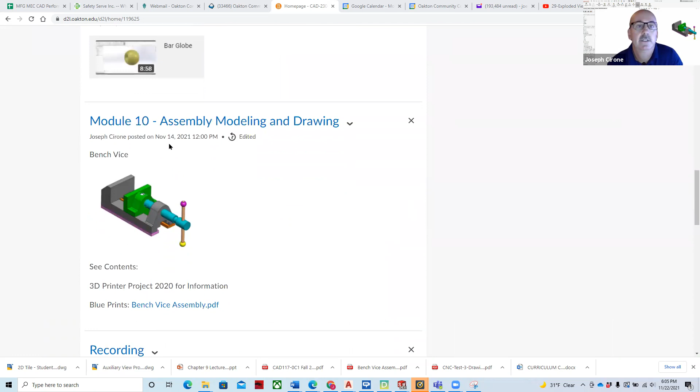We're going to continue to work on the bench vise, which is going to be due December 7th. This week is Thanksgiving week, so we're just going to continue working on our assembly drawing for module 10, and then we have module 11, our last one, and module 12.

To start this off, what I did was model the components, and I have them already set up into a folder here. Here's the folder where I created all the components. What we're going to do is a bottom-up modeling technique, which means we have the components already drawn, and then we're going to assemble them.

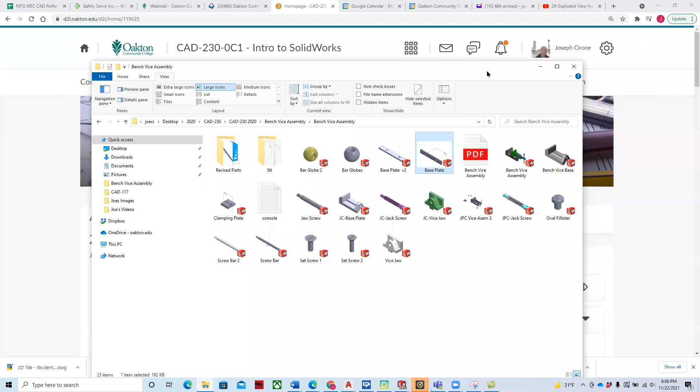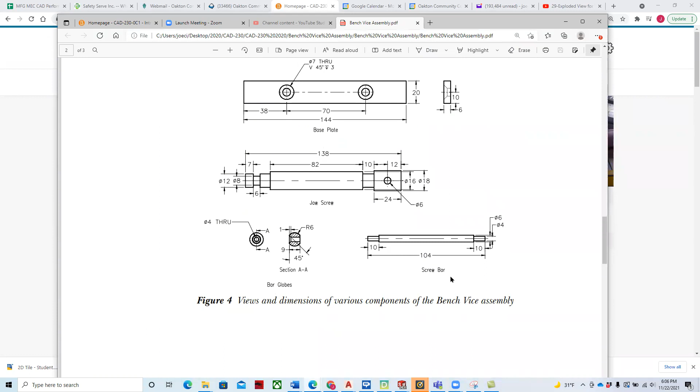If we take a look at the actual vise itself, here's what the bench vise looks like. It's composed of this base, the vise jaw, the base plate, the jaw screw, these bar globes, the screw bars, and then we have these three screws and this clamping plate.

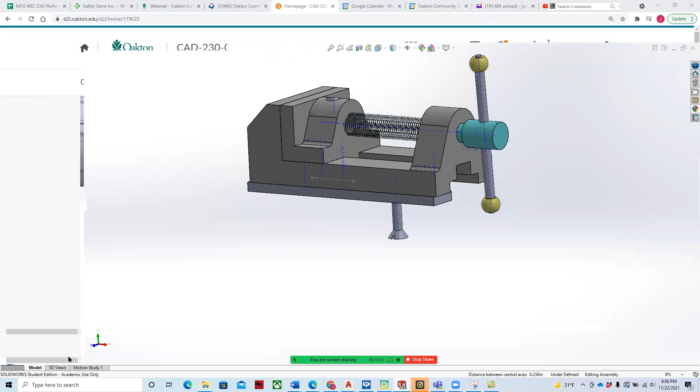It's a metric drawing, and we're going to go ahead and get that started. So we're going to start off in SolidWorks. Here's what the completed model will look like.

We're going to start off by saying File, New, and we're going to make an assembly. We'll say OK. I'm going to switch over the units for that—I guess the units don't matter. I'm going to start off by dragging and dropping in the bench vise base.

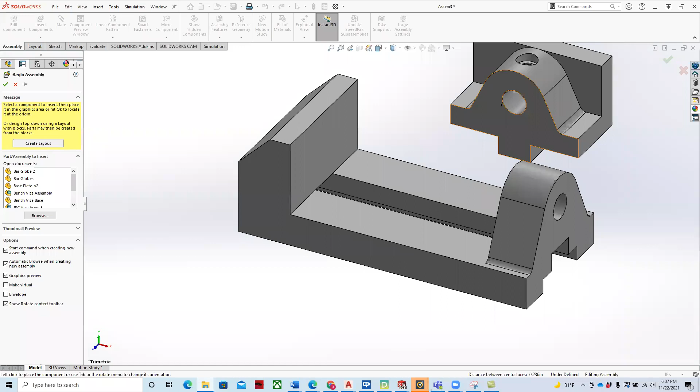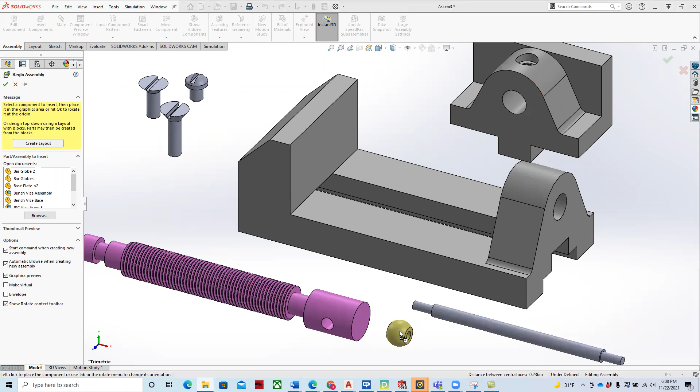Then I'm going to go through and drag in the other components: the jaw, the jack screw, the screws, the screw bar, the globe, and the base plate.

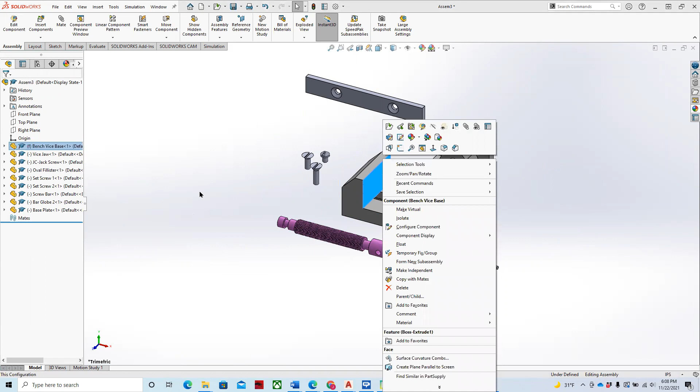Now that we have the components, what we're going to do is start to mate these different objects. You'll see that the first object I brought in has the letter F on it, which means it's fixed—it's not going to move. If we wanted to unfix it, we'd have to click on it and float it, and then we could move it and tie it back down to the origin. But for right now, it's fine the way it is.

I'm going to go up to View and go to Hide/Show, and I want to show the axes and the temporary axes of the parts. That way I can use those also to mate components too.

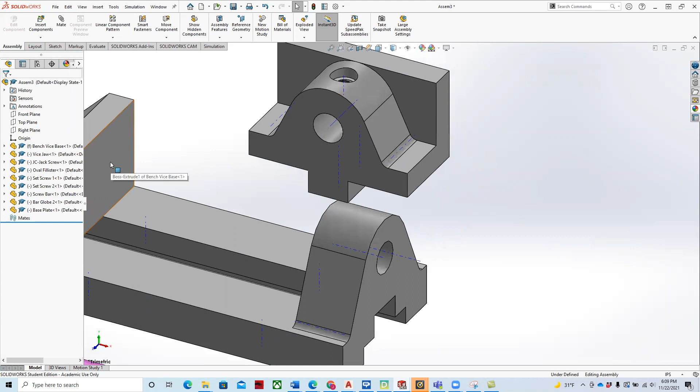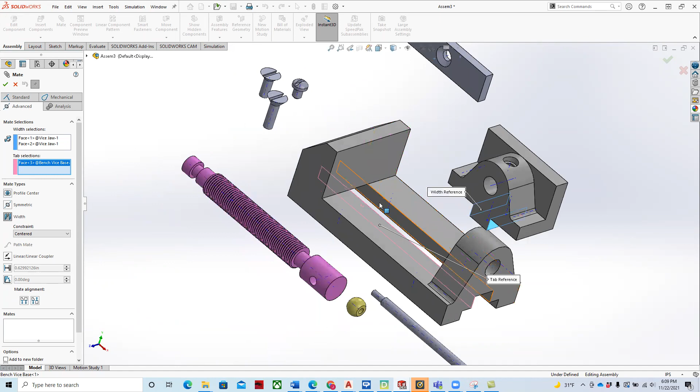We're going to start off by mating this component to this component. I'm going to start by using a width mate. So I'll go to Mates, into Advanced, and say Width, and then mate this side here and this side here to this side here and this side here. Then I'll mount those in between there with a width mate.

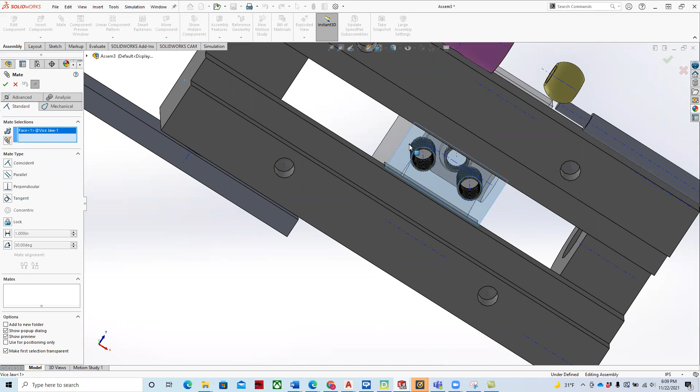Then what I'll do is move this component in here in between it, and I'm going to see if I can mount this one to this one. No—let's try that again. There we go.

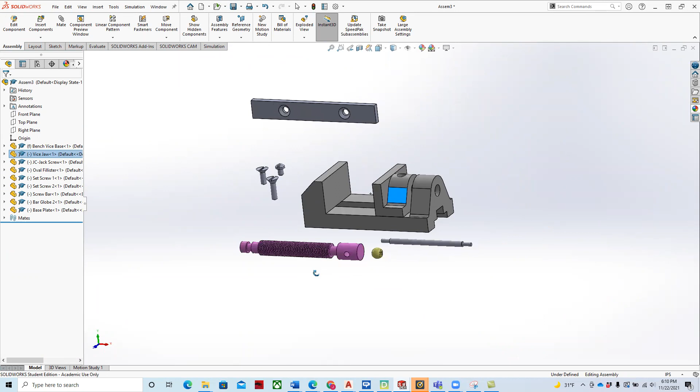So we have a coincident mate and a width mate. If we green check mark this, we should be able to move this all the way through it. Now that we've been able to put that into the proper location, what we're doing is removing certain degrees of freedom from the part.

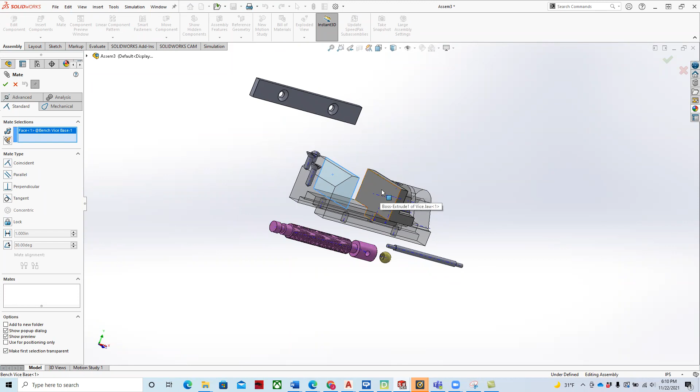What we're going to do now is mate with a distance mate this jaw to the front. So we'll go to Mate, select this face and this face, then go to Advanced, go to Distance, and set up a distance of 2.5 as our maximum, and our minimum will be 0. Green check mark. That will then mate only in between those two components.

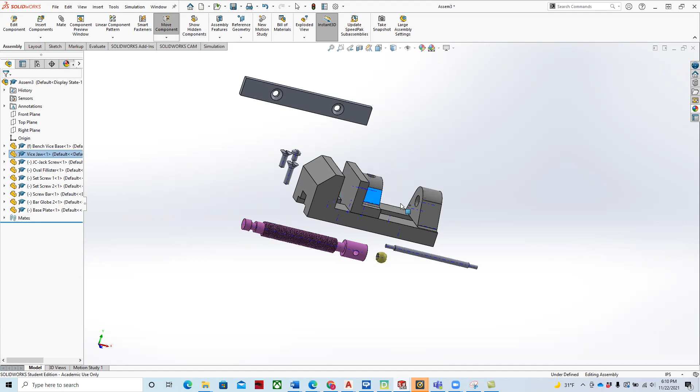All right, so far so good. Let's go ahead and put on our jack screw. We'll go to the Mate command, and we will mate this cylindrical feature to this cylindrical feature, and green check mark that. Then I'm going to pull this back.

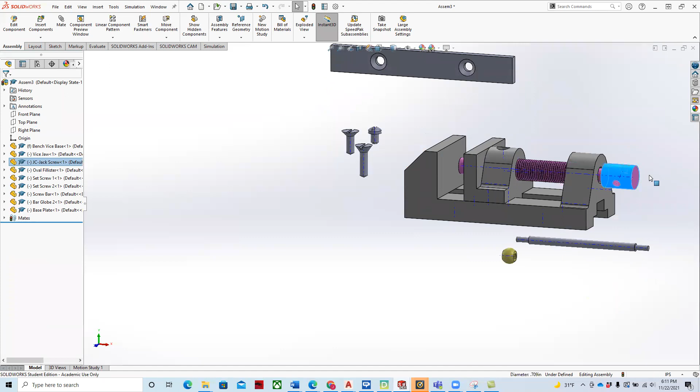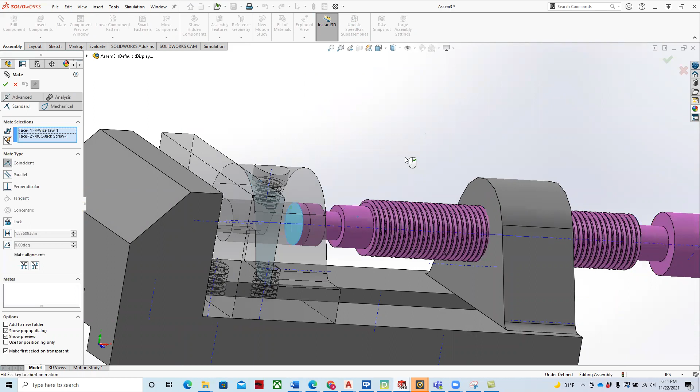Well, that didn't work exactly the way I thought it would. Let's see what's going on here. There we go. All right, and then we're going to mate this end to... oops, let's clear that out.

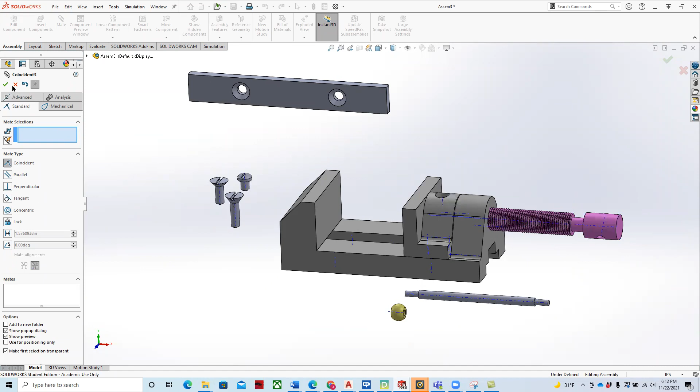Did it again. Must have took that last mate. Yeah, it did. So let's go and expand our mates, and let's just go. Well, that one's still okay because it's still concentric. It's just getting glitchy on me, that's all.

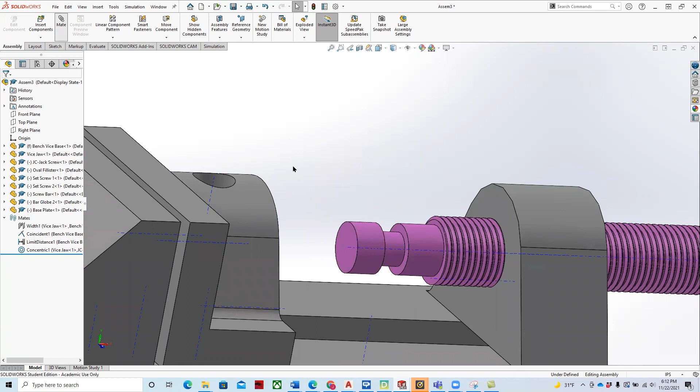All right, let's click off the part. Try this one more time. Mate this surface. Yes. And this one.

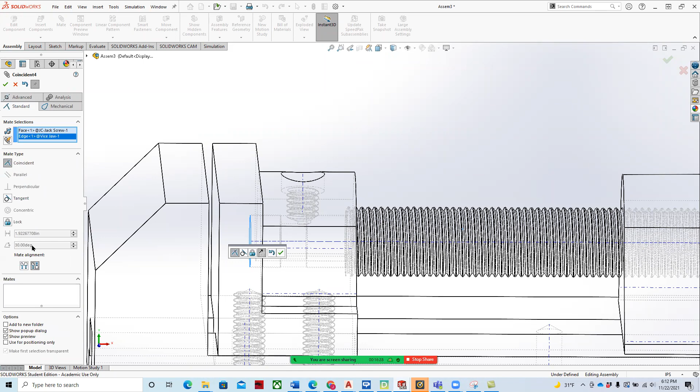Great, and then what we're going to do with this is change the visibility so that we can see it. And then what we're going to do is go into our advanced mate. And we should be able to move that.

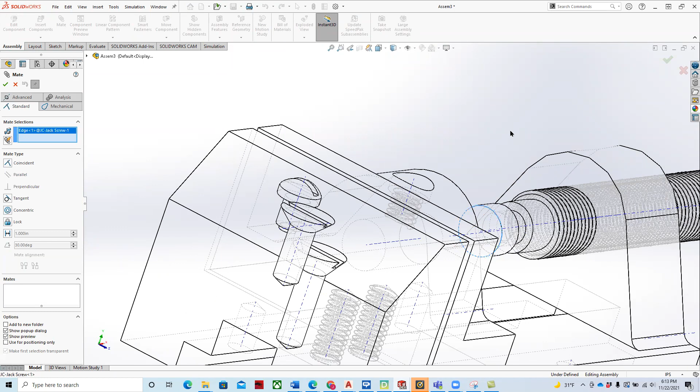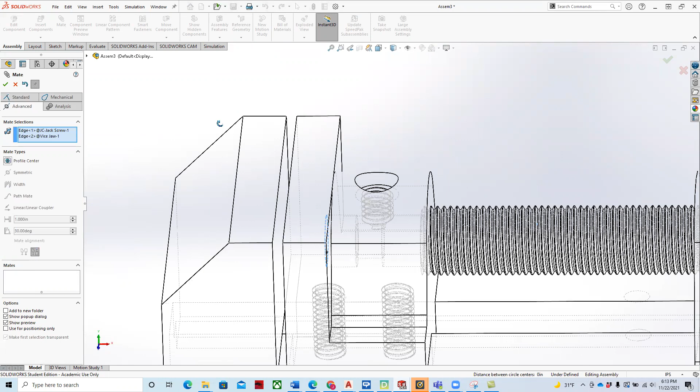Well, that's one of those days. It's good enough, it does mate to the bottom of it. I was going to try to adjust it a little bit to get it within there, but it's taking too much time, so I'm going to just leave it.

All right, so that component is now modeled. And now when we go through and we move the vise, we can see that those components work together.

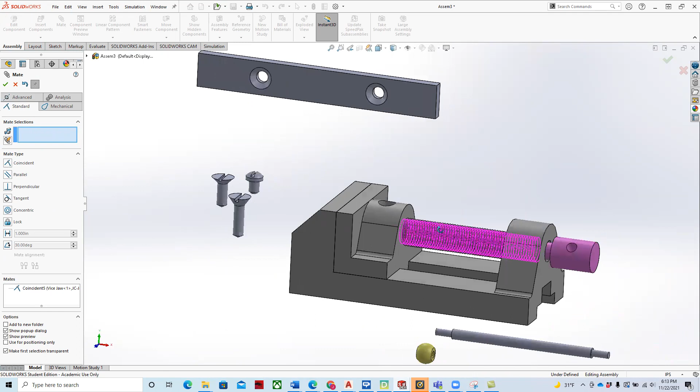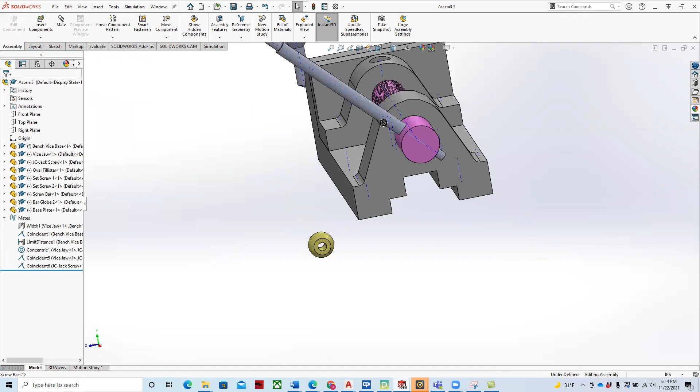We're going to go ahead and mate the axis for this to the axis for that. Green check mark it. And then we're going to move this down. And then we're going to mate.

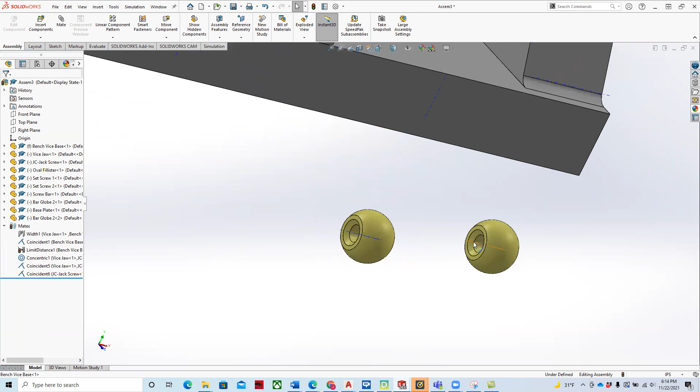Let's make a second bar globe, hold control and drag a copy off. And then what we'll do is we'll mate this to this. There we go.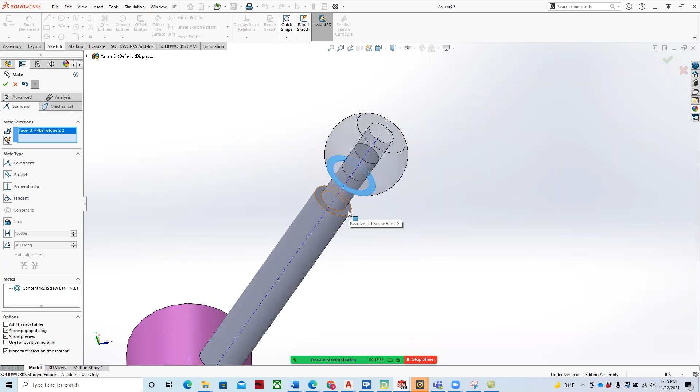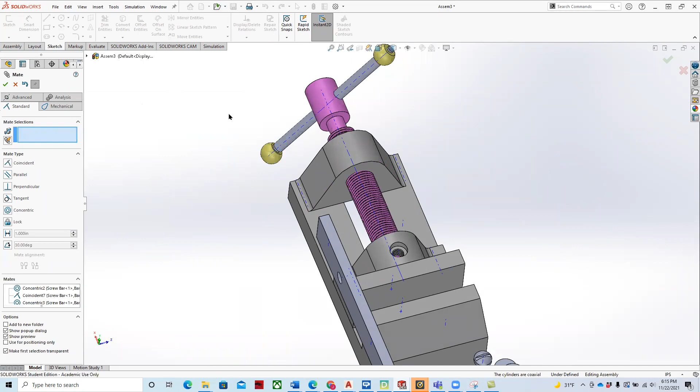There we go. We'll do the same thing on the other end. And I'm going to reverse this. And then I'm going to mate this part to that part.

All right, so far, so good. Now this part's a little tricky because you would think the components are the same distance from the edge, but they're not. So sometimes this will fail. Let's try it, let's go ahead and mate. Looks like I was mating the axes. That might work better, let's try it.

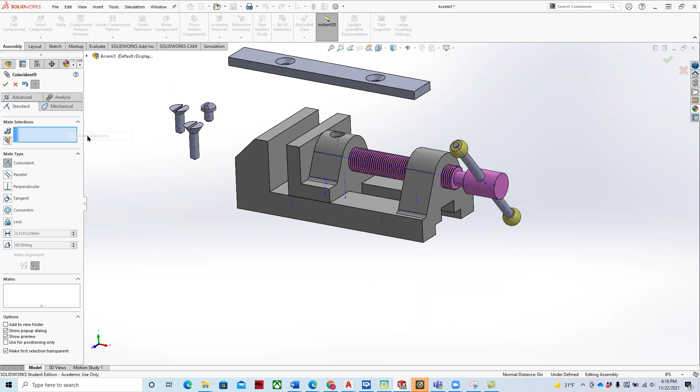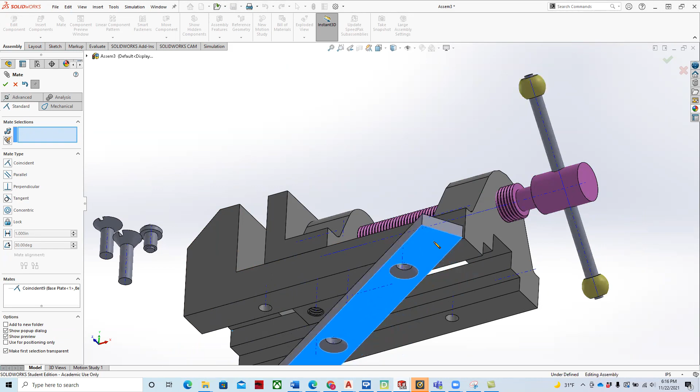No. All right, so we have a concentric mate there. And then the trick is to see which holes this lines up with, if it's that one or the other one.

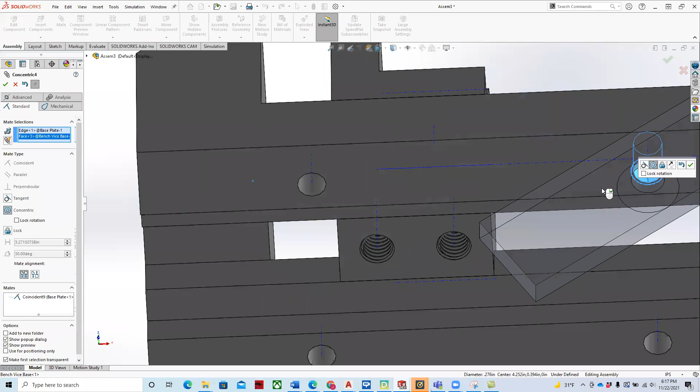So I'm going to guess that it's the other ones. So I'm going to say this one and this one. And we'll see in a second here if this lines up.

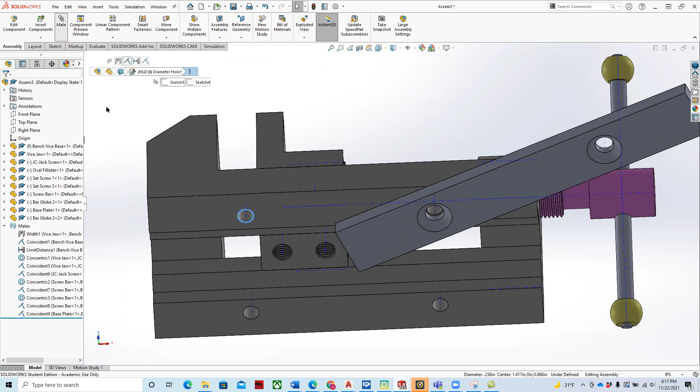No, it's one of those days. Let's get rid of that mate, that last one. And let's mate it again, this one. There we go.

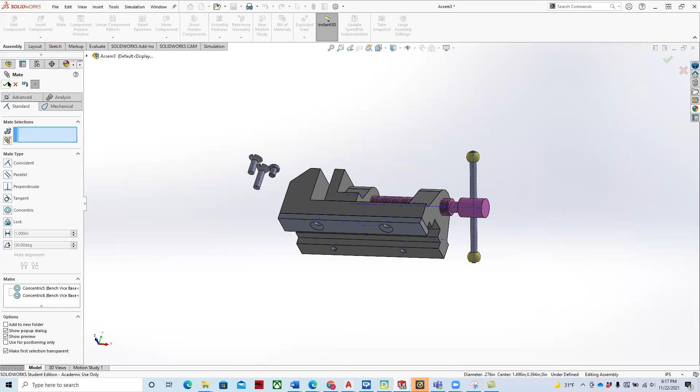There we go, everything's nice and lined up. And what I'm going to do is create a copy of that by holding the control key and then dragging another one off there. That way I've done most of the work. Let's mate the next one, clear that.

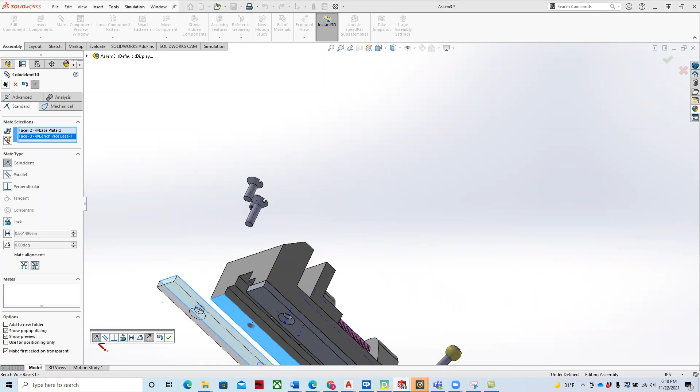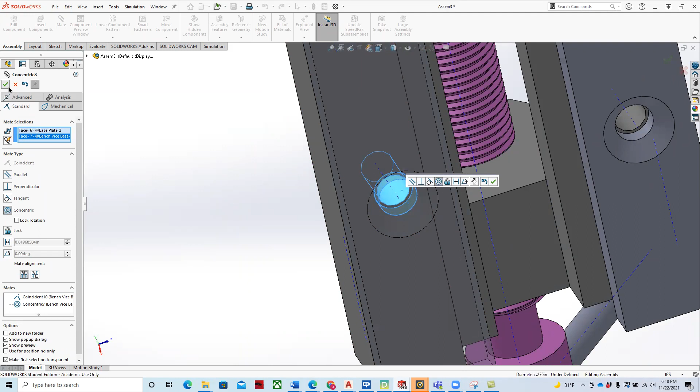And even though this one's not mated, we will mate it because it will not last by itself. All right, so that's those components. And then we'll go ahead and mate the screw geometry here.

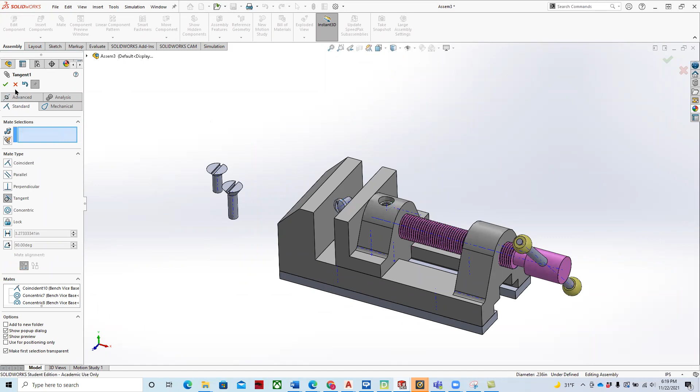Nope, not that way. Let's try it again. There we go. And we'll mate the underside there to this face here.

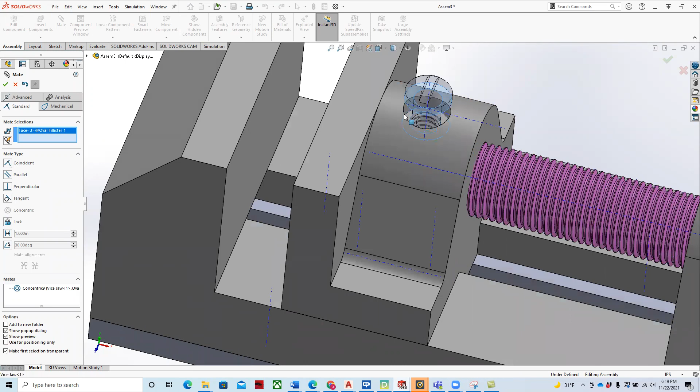And then lastly, we need, and I left one component out, I left out the clamping plate. So let's bring that in here. Once I get out of that mating command. There we go, all right.

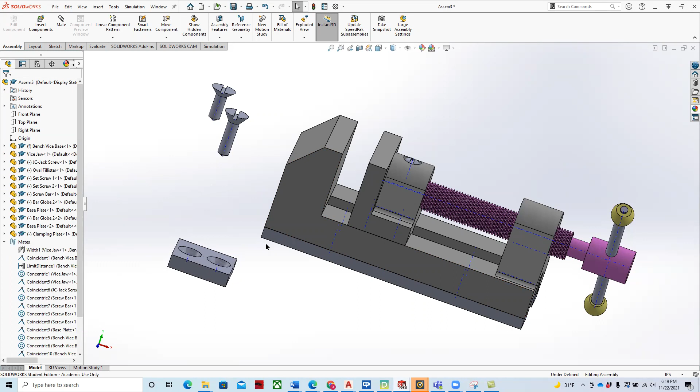And so let's go ahead and put these pins in. I'm going to say, let's try the long ones first. Yep, that's a little too long. So it's the shorter ones.

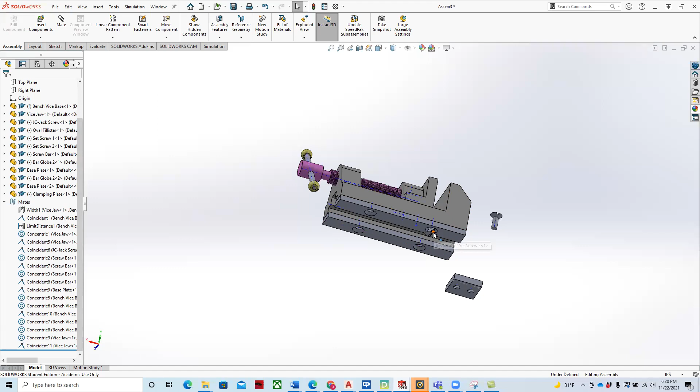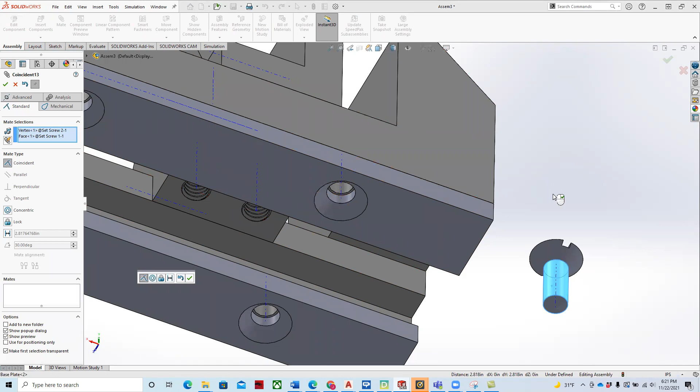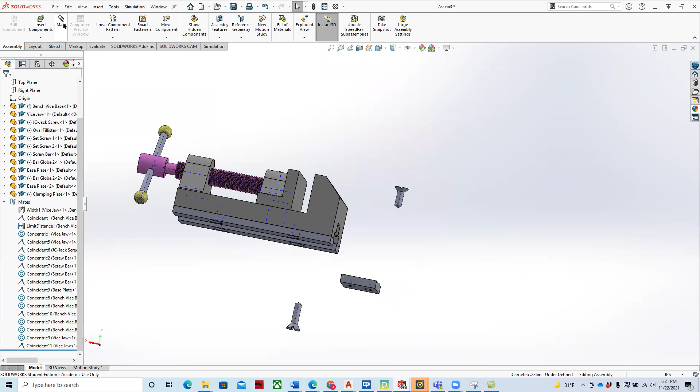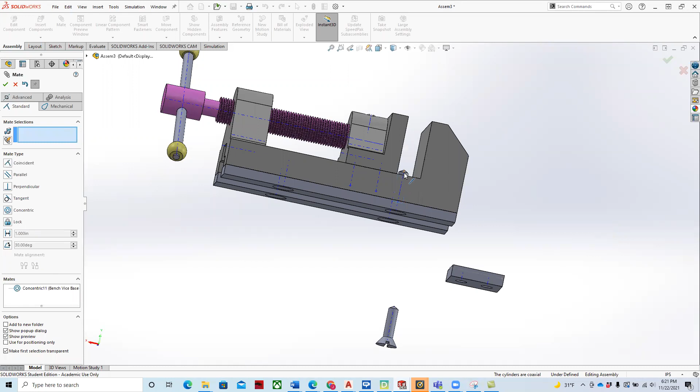All right, let's get rid of that last one. All right, let's take that one out. Yeah, let's flip that. There we go.

And let's mate. And then let's copy, again holding control. 1, 2, 3. Didn't get my third one.

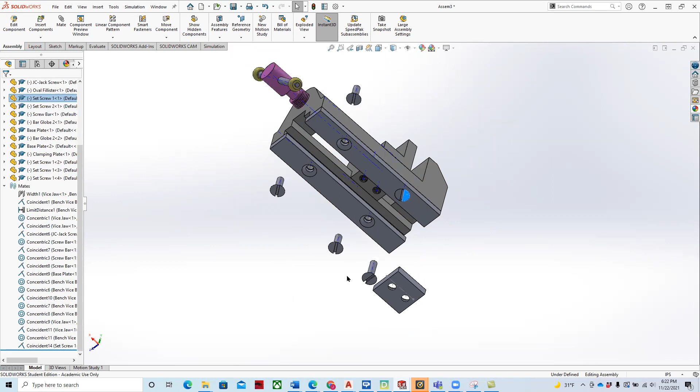You have to let go of the button on the mouse before you let go of the control key. It's always a little tricky. All right, and lastly, let's clear that out. Let's mate.

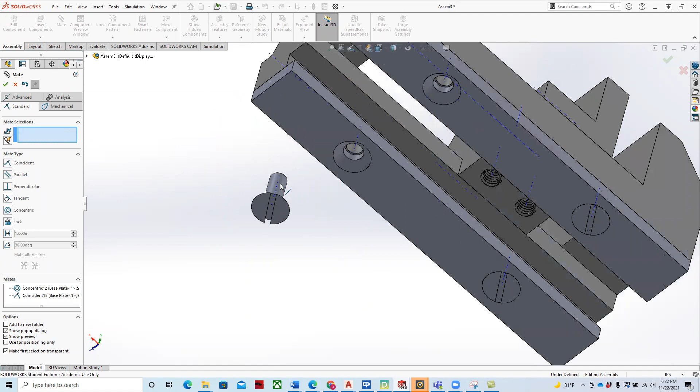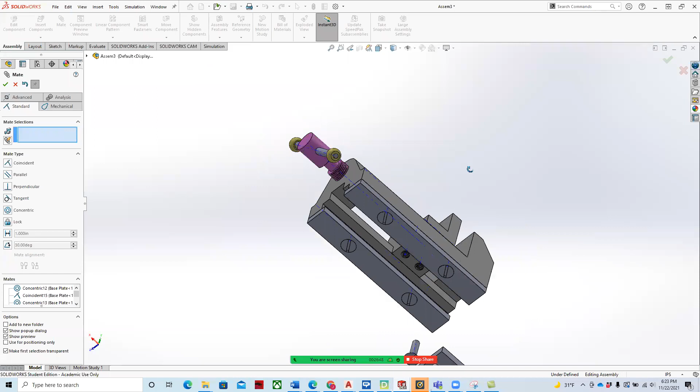All right, and then lastly, we're going to mate to the bottom of here. So we're going to come in this to this, and we're going to flip that.

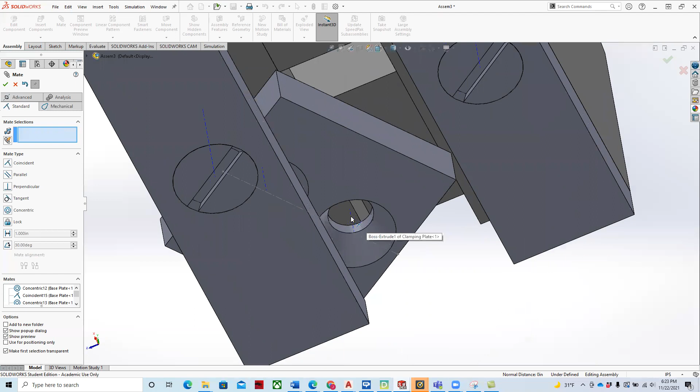Green check mark. And then we're going to go with this to that, and this to that. And we will then mate this to there.

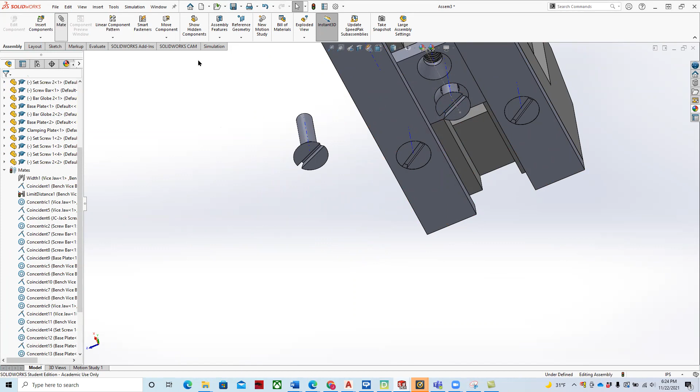Let's copy it. And then we'll add another one. All right.

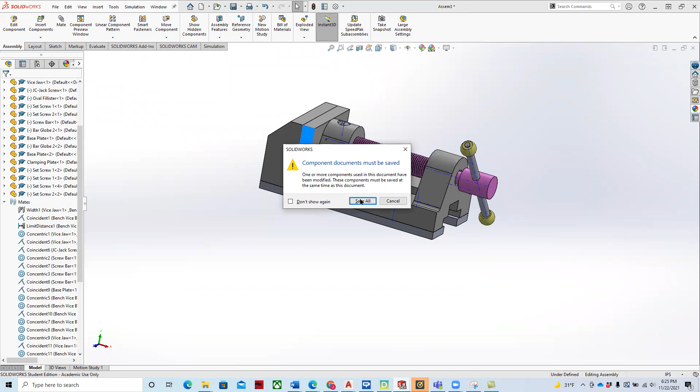All right, so that's basically how we want to create all the mates for this drawing. We'll save that. And we'll save the documents for those as well.